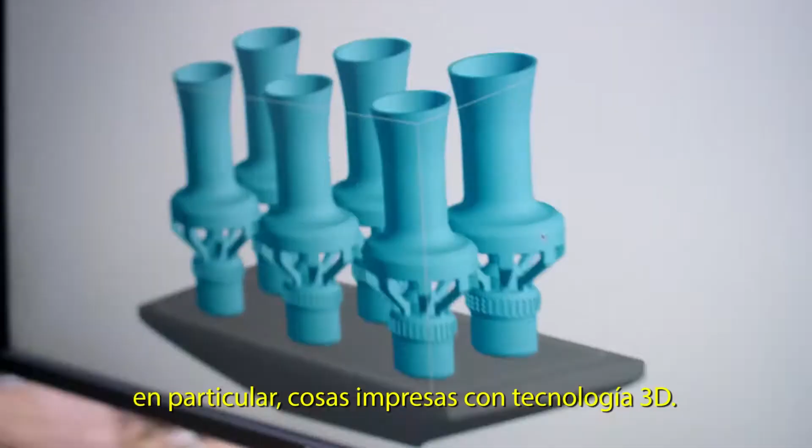Welcome to Carbon. We're a technology company changing the way the world makes things, specifically 3D printed things. We didn't start out trying to change manufacturing forever.

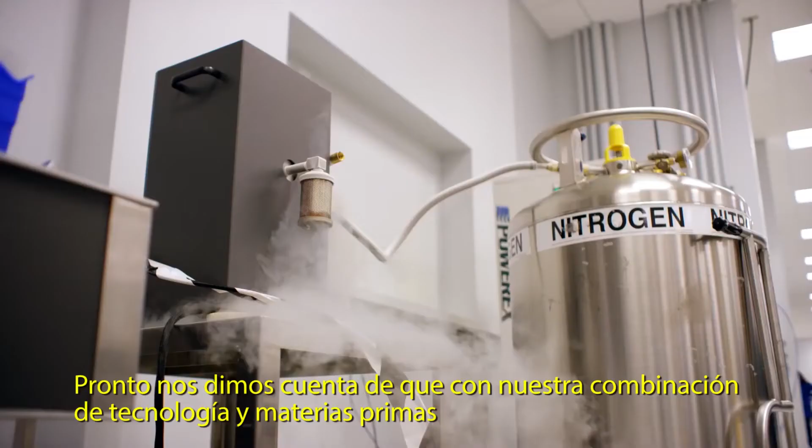We started with the simple goal of making 3D printed parts better. It's 25 to 100 times faster, which is game-changing. But we quickly realized that with our combination of technology and materials, we could make real parts with mechanical properties and surface finishes that make injection molded plastics obsolete by comparison.

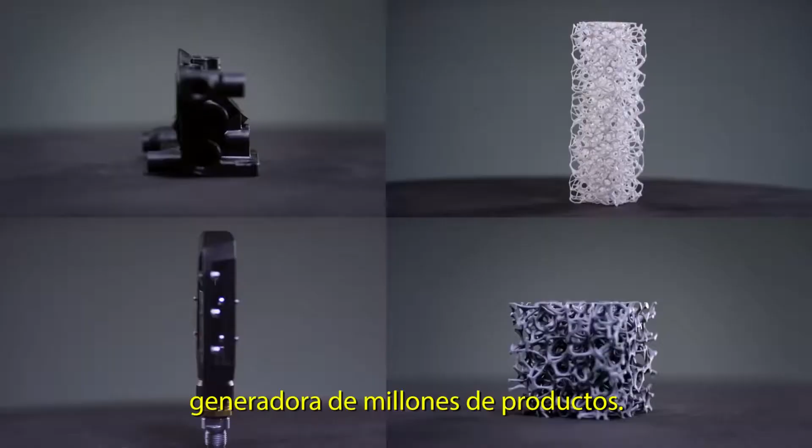Embracing the idea that speed to production isn't an obstacle anymore, it's the only way forward. And our partners share our enthusiasm for reinventing the rules. Partners who are manufacturing at scale, making millions of real products.

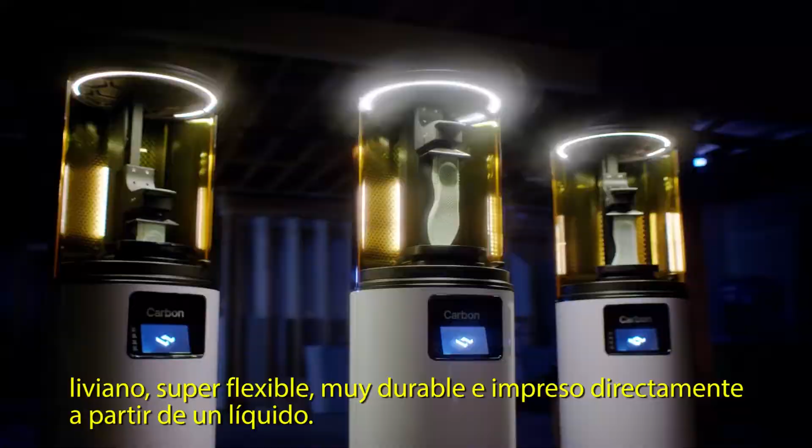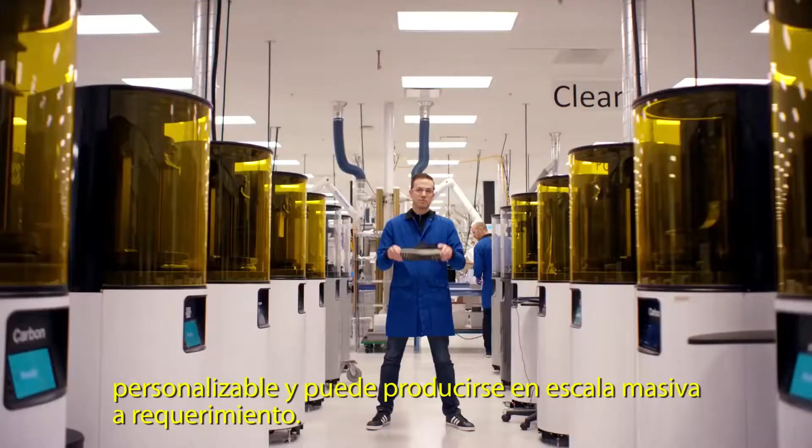In partnership with Adidas, we've created a midsole that shouldn't exist so that they could make a shoe that shouldn't exist. Light, super flexible, highly durable, and printed straight from liquid. A marvel of design and function, this shoe defies logic. And whether you want to make one or one million, this is true, customizable, and on-demand mass manufacturing.

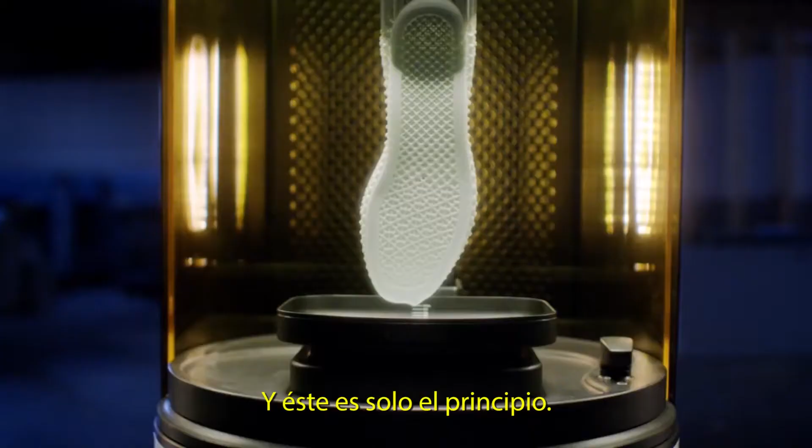This is not a publicity stunt. This is a revolution, and we're just getting started. Stop prototyping, start producing.

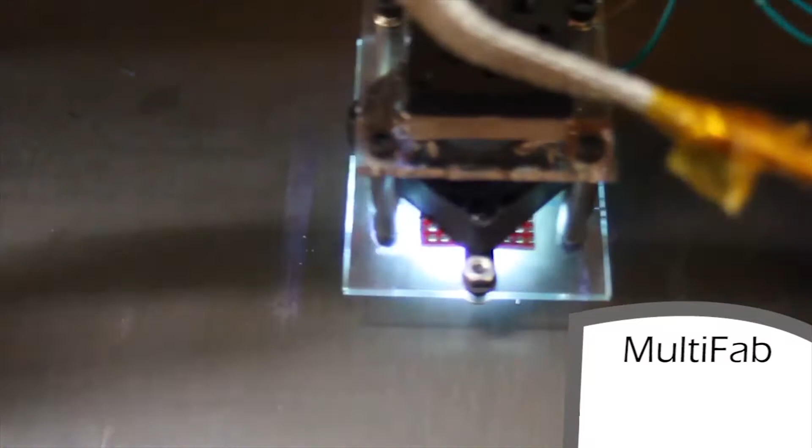The state of 3D printing today goes two ways. There are people developing machines that can print with materials we currently use through traditional manufacturing processes, and there are people developing platforms based on multiple materials. This will enable a broad range of new applications by manufacturing products we weren't able to make through traditional techniques.

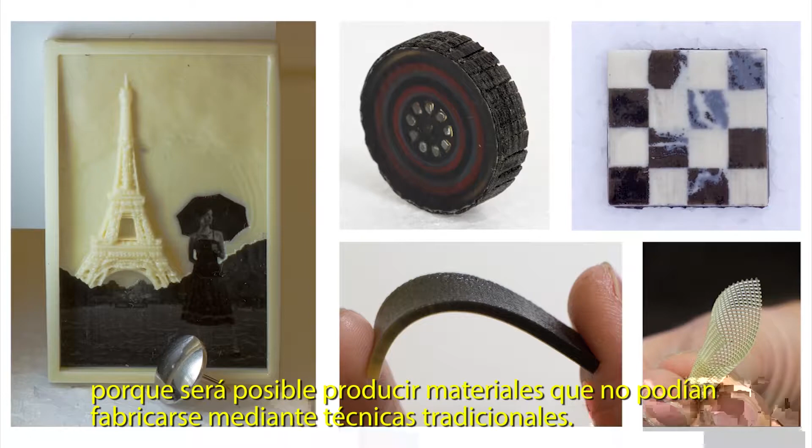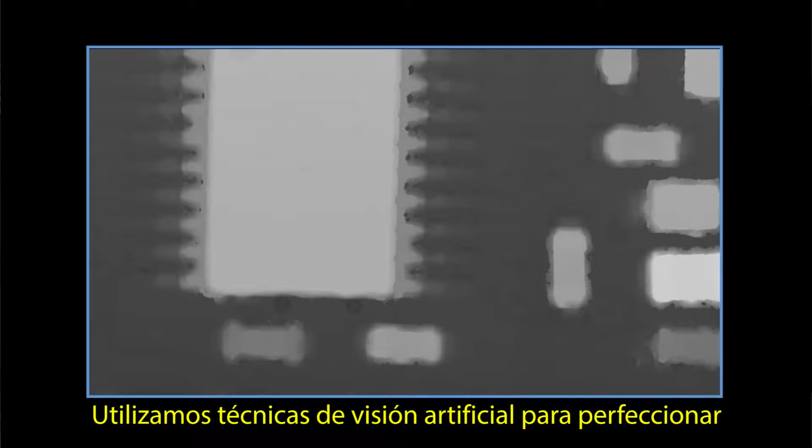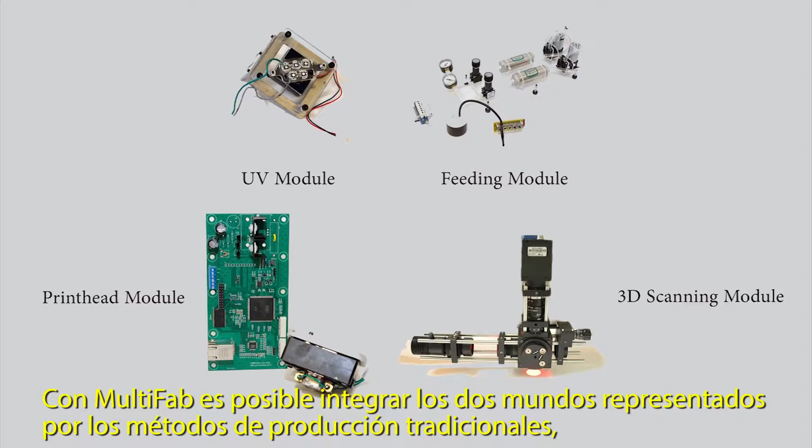We've developed a low-cost, multi-material 3D printing platform that can print with up to 10 materials, and it's machine vision enabled. We use machine vision techniques to enhance the capabilities of current multi-material printing technologies. We call our project MultiFab. With MultiFab, you integrate these two worlds of traditional manufacturing and 3D printing, and by putting them together, you can create a whole new range of objects that we haven't been able to make today.

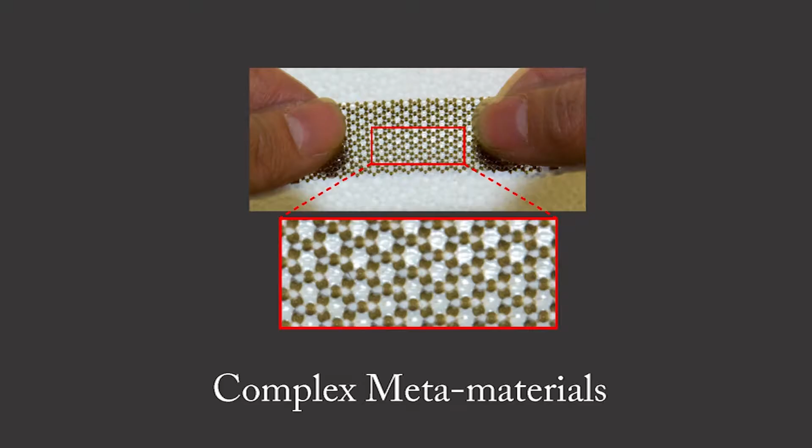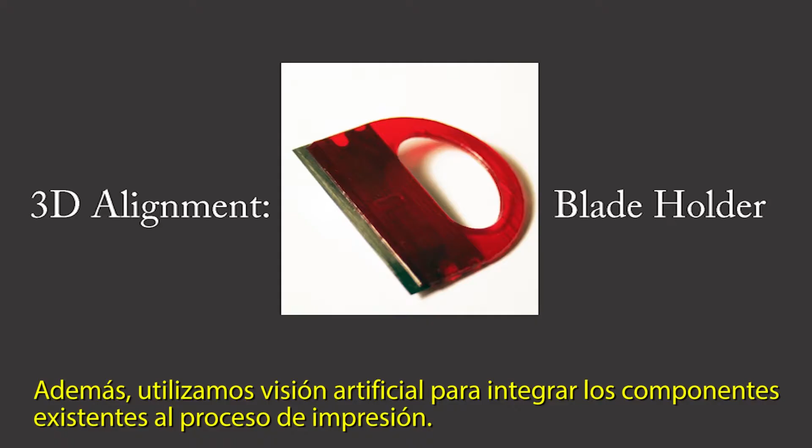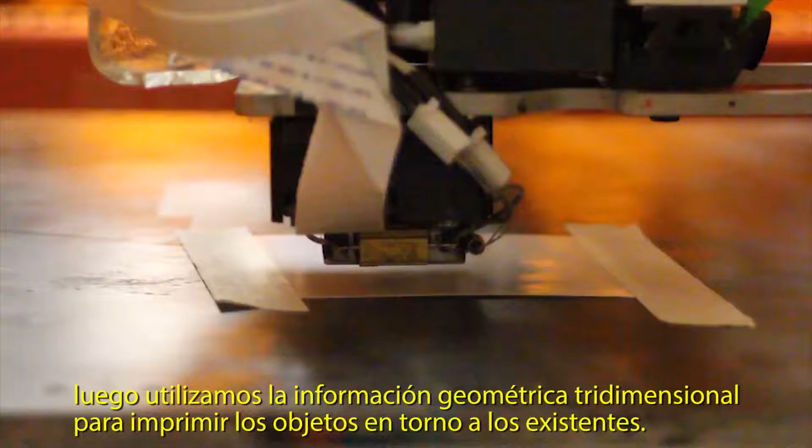The machine vision system integrated in MultiFab allows us to easily and very quickly calibrate the printing system. Second, we use machine vision to integrate existing components into the printing process. So imagine we put components into the printer's build platform, we scan the objects, and then we use that 3D geometry information to print objects around those existing objects.

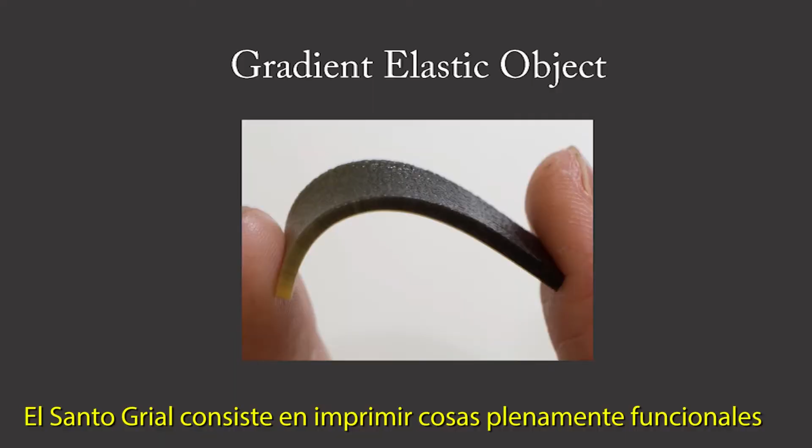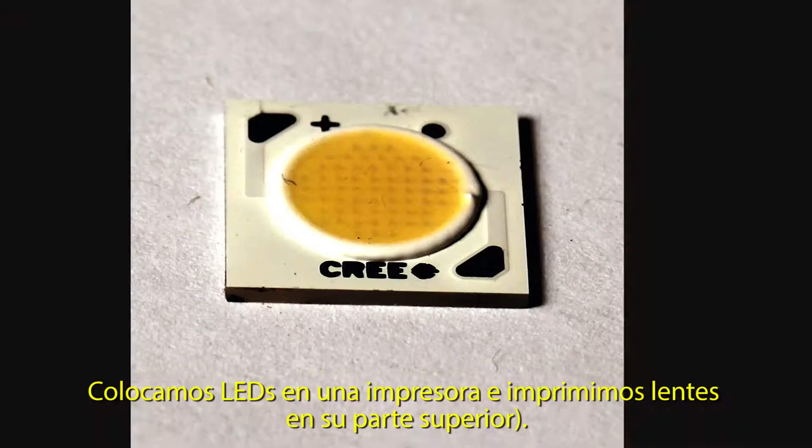Right now, a big portion of the 3D printing hardware available is focused on printing form and objects for prototyping. The holy grail is to print things that are fully functional right out of the printer, combining multiple materials with many different properties, but also existing objects that have some inherent functionality. We printed lenses on top of LEDs. We put this existing LED into the printer and we print a lens on top.

Designers and engineers are used to designing with one material, so the whole design paradigm, how we actually design products and objects, will have to change. That's going to require new hardware, new software, and whole new platforms, and we're going to have to change the way us engineers and designers think about design and creating products and objects.

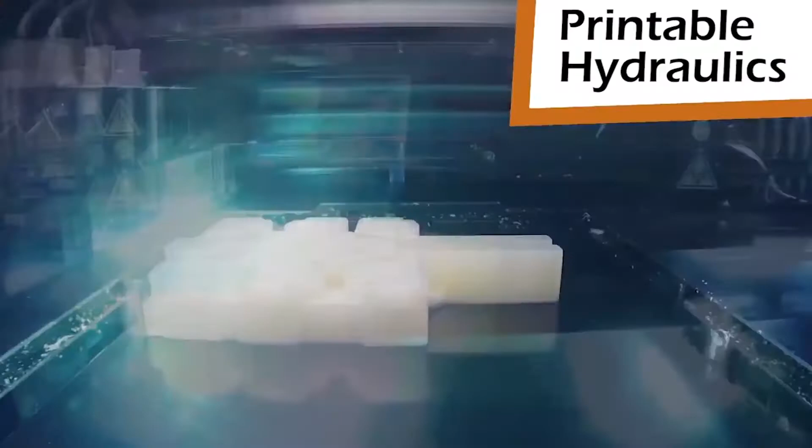MIT researchers have created a working hydraulic robot from a single 3D print, meaning the robot can move right off the printer after it's done, no assembly required. The tiny six-legged robots are out of MIT's CSAIL Computer Science Lab and are made of both liquid and solid parts that are fully functional right after the printing process.

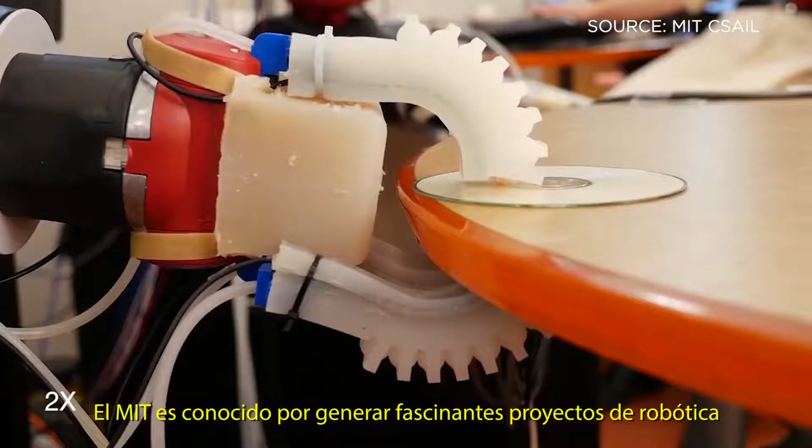The group used a printer from Stratasys, one of the largest 3D printer makers, and it can work with 8 different materials at the same time. MIT is known for producing intriguing robotics projects. It's worked with DARPA, NASA, and other organizations to create humanoid robots in the past. This fully assembled robot from CSAIL isn't exactly C-3PO, but it can walk off the printer using built-in bellows.

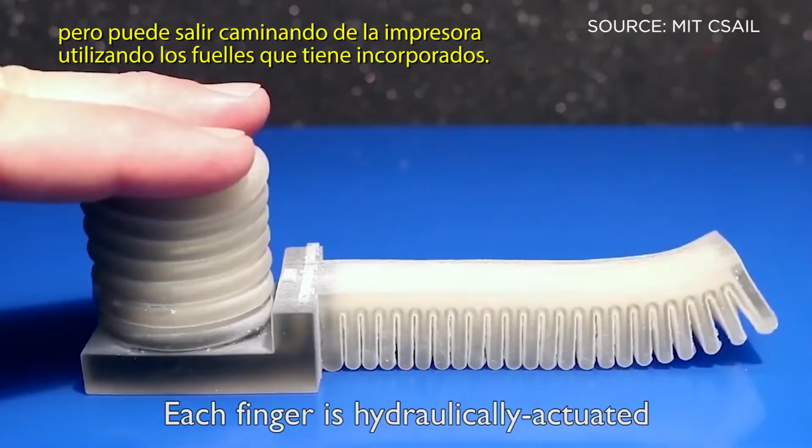The robot only weighs about 1.5 pounds and is 6 inches long. The little bellows allow fluid pressure to build up to the legs and push the tiny robot forward in a walking motion.

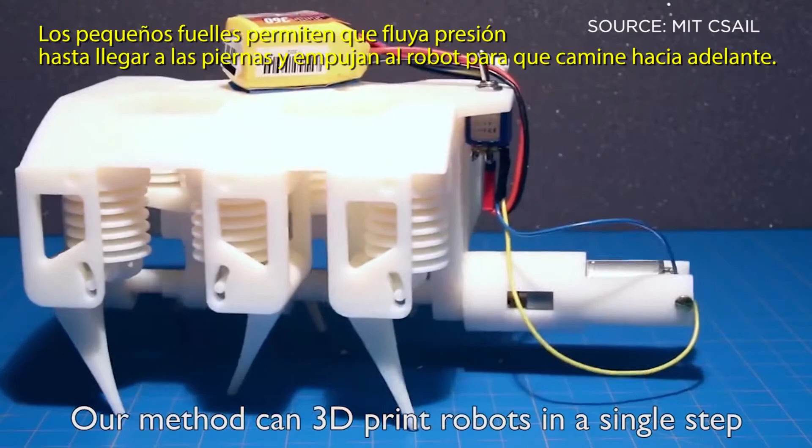The new MIT technology could have some pretty big implications in manufacturing's future. Think about printing off other household machinery in one go and just adding batteries.

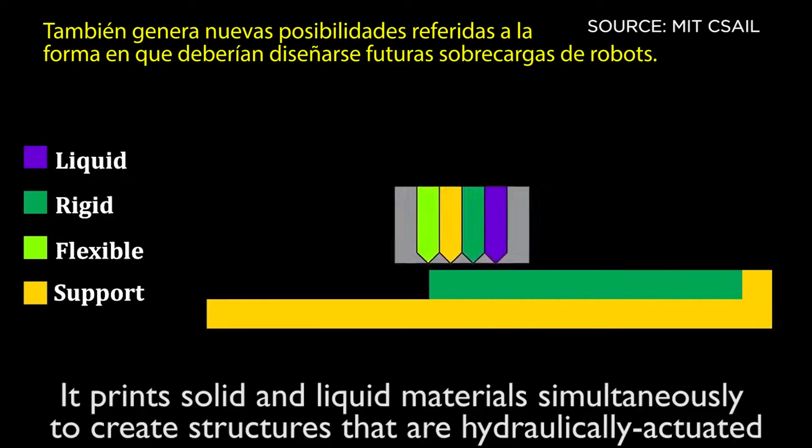It also opens up new possibilities for how we might design our future robot overlords. Think about it. What happens when the robots figure out they can just print more of themselves with the flip of a switch?

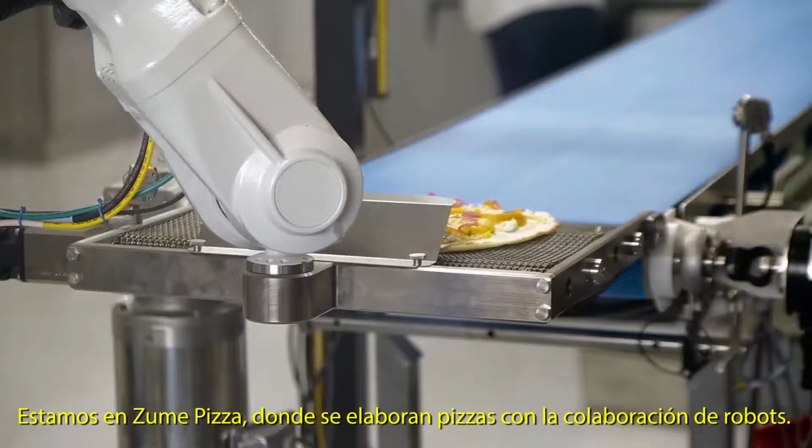We're here at Zume Pizza, where they make pizza with robots. We're gonna see how they do it, but first, let's order a pie.

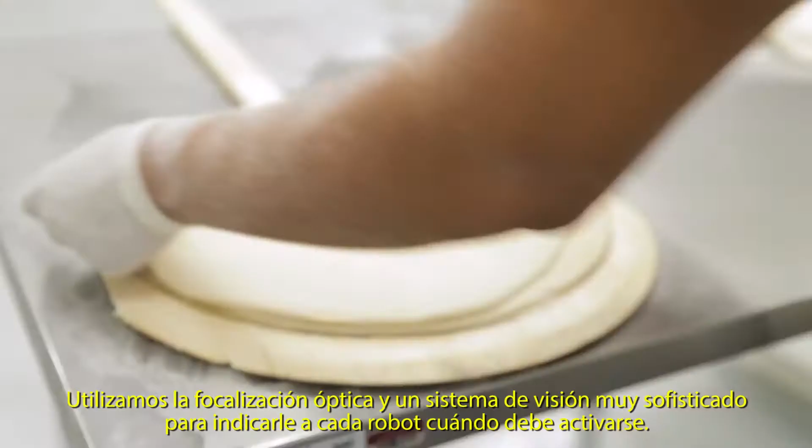At Zoom, humans and robots work together to make pizza, and you can see it happening from start to finish. The first step in the process is that the pizza is put onto the line. We use optical targeting and a pretty sophisticated vision system to tell each robot when to trigger.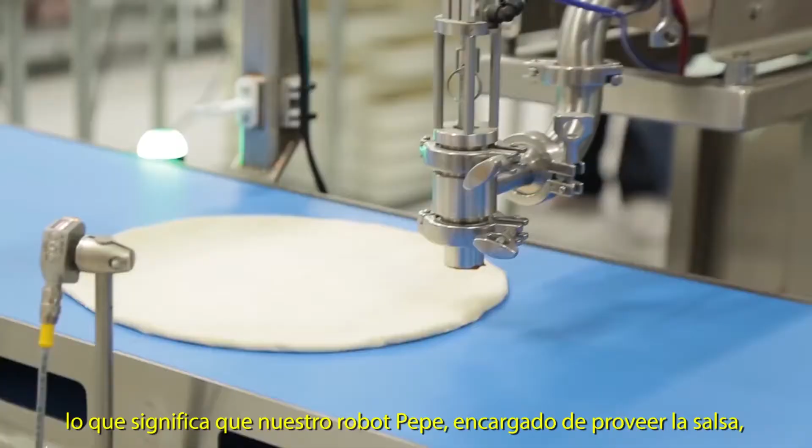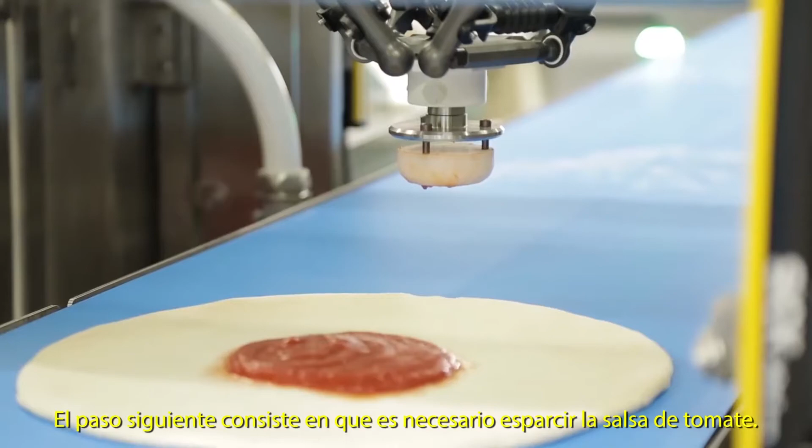So your pizza has tomato sauce on it. That means Pepe, our tomato sauce dispensing robot, knows when the optical target reaches its laser to dispense the exact perfect amount of sauce, which he did just now. Next, Marta, our sauce spreading robot, will take that sauce and spread it into a spiral.

The next step in the process is done by humans. Noel is one of our amazing pizzaiolos. He's gonna take that pizza, adjust any imperfections, and then actually begin to add cheese and toppings.

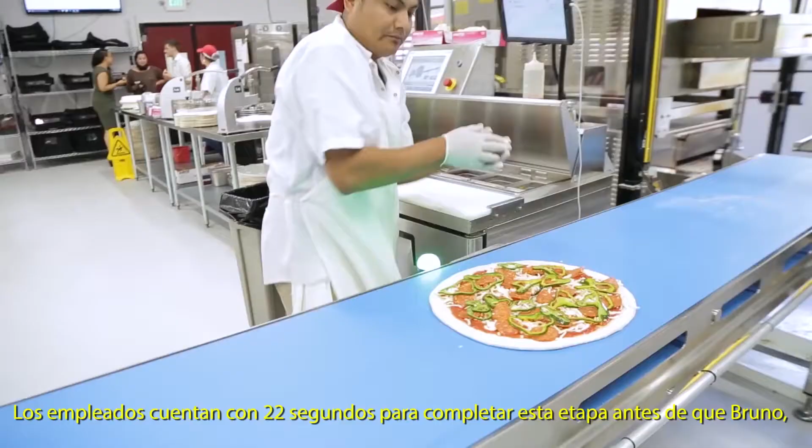The humans have 22 seconds to complete the topping step before Bruno, the next robot, takes the pizza off of the line and puts it into the par bake oven.

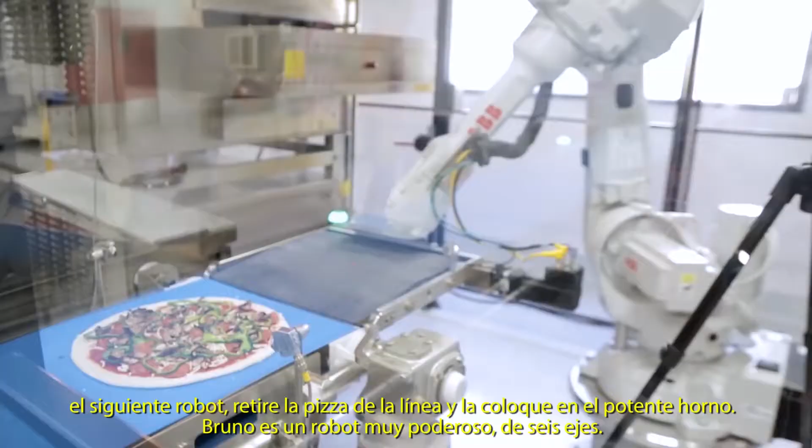Bruno is a very powerful robot. He's a 6-axis robot. You've seen this kind of robot mostly in manufacturing settings. We're using this robot to make pizza, so that means we need to fine-tune this robot so that it can actually mimic what a human would do with a similar tool.

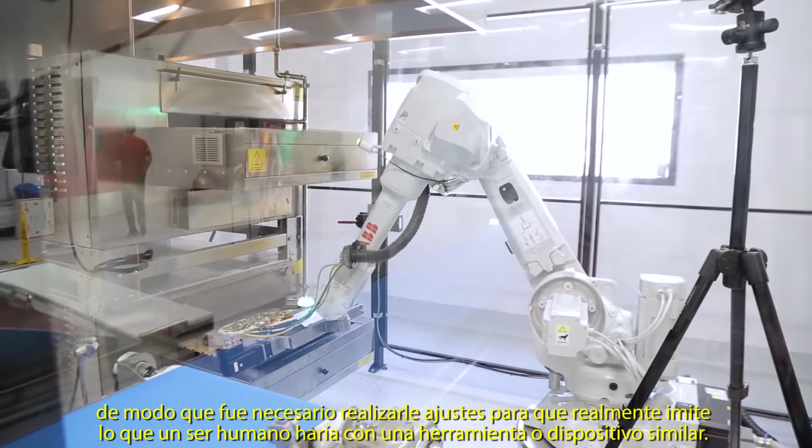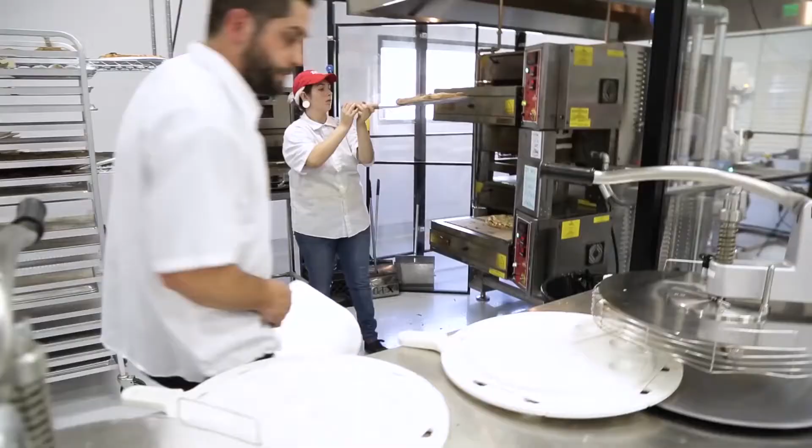So your pizza's ready. Oh, looks so good.

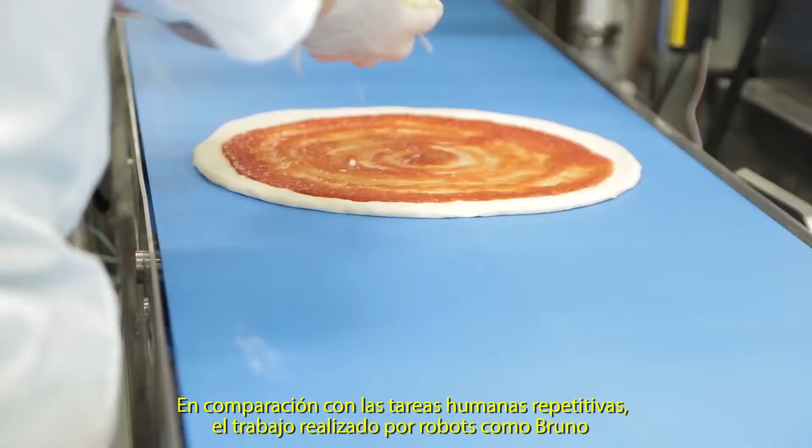So Giorgio, Marta, Pepe, Bruno, the pizza making robots that you saw today, allow us to reduce the amount of time for each individual pizza preparation step. They allow us to reduce the error rate because robots are designed to make the same motion consistently and perfectly. And they also allow us to invest more of our resources in high quality ingredients as opposed to repetitive manual labor steps.

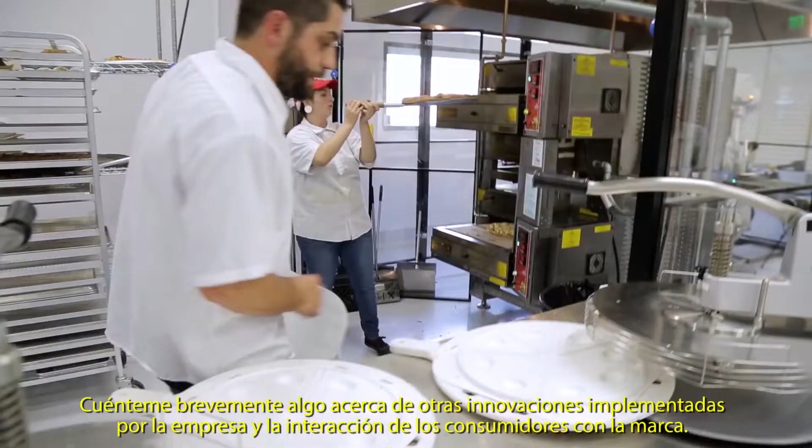Tell me a little bit about some of the other ways that you guys have been innovating, especially in how the consumer interacts with the brand. We want people to be able to get the highest quality food in about half the time.

Our average delivery right now is 22 minutes, and that's 22 minutes from the second that you place the order on your phone or computer to the time it actually arrives at your door. So your pizza is never sitting around.

And we have this team of pilots that are tied into a logistics and routing program that allows them to optimize their routes and minimize the amount of time that it takes to drive to your door.

You guys are already using robots, but what's next? You know, the next most important step for us is what we call baking on the way.

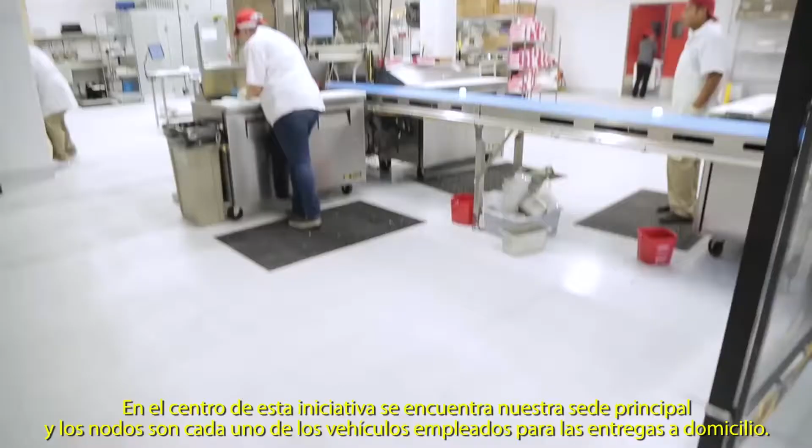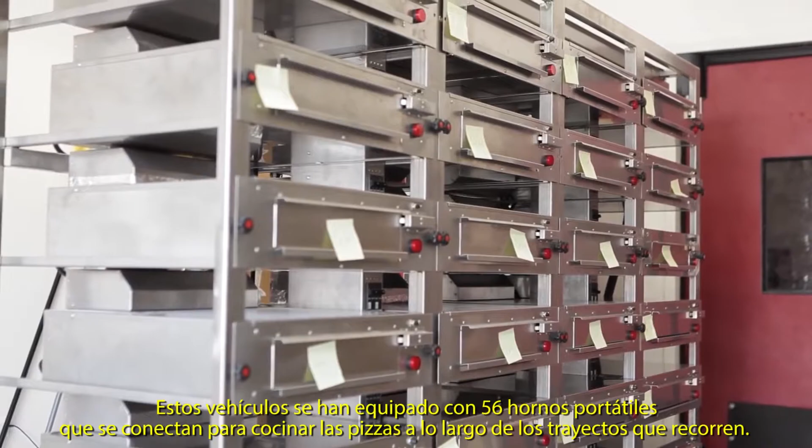In the center of it is our hub, our home facility here, and then each node is an individual delivery vehicle. Those delivery vehicles have 56 proprietary mobile ovens that are wired to actually cook pizza while it's being delivered. And Zume owns the patent for this technology, which we call cooking en route, or better known as baking on the way.

And so right now it's just pizzas, but am I going to be able to get like beef bourguignon someday via robots? You know, right now we're hyper-focused on giving you the highest quality pizza that we possibly can, and so that means we have to be laser-focused. But you know, it's a big wide world, and there's certainly additional opportunities to innovate beyond pizza.

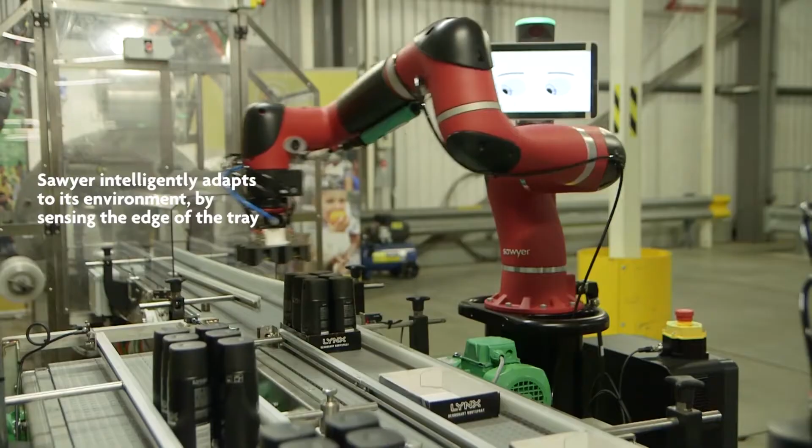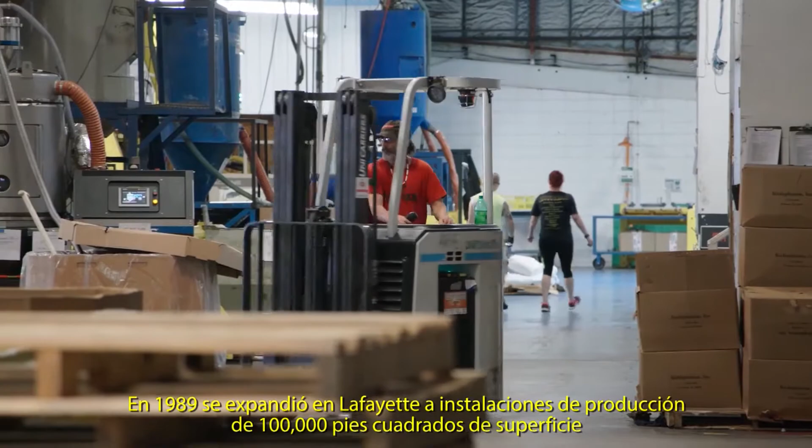Tennplasco was founded in 1985 in Carthage, Tennessee. In 1989, Tennplasco expanded into Lafayette, and now it has grown to 100,000 square feet of manufacturing facility and 86,000 square feet of distribution facility.

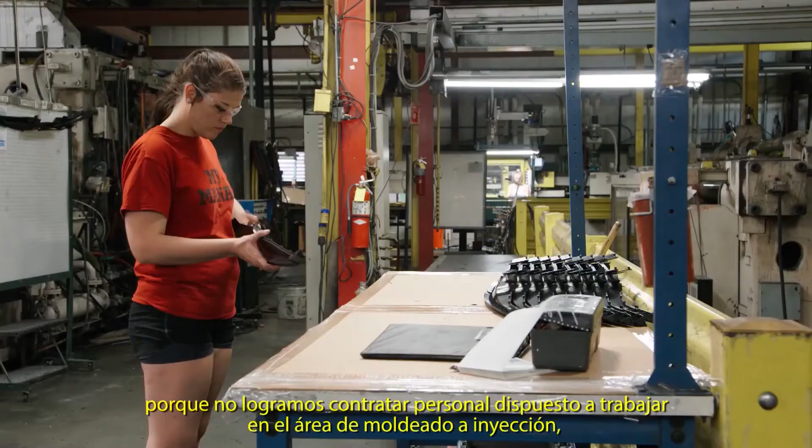While the economy is doing very well, we are having a very difficult time getting people to work, especially on the off shifts in the injection molding floor. Our customers are trusting us to support their business, so we have to find a way to meet their needs. We've been able to achieve that through innovation, technology, and robotics.

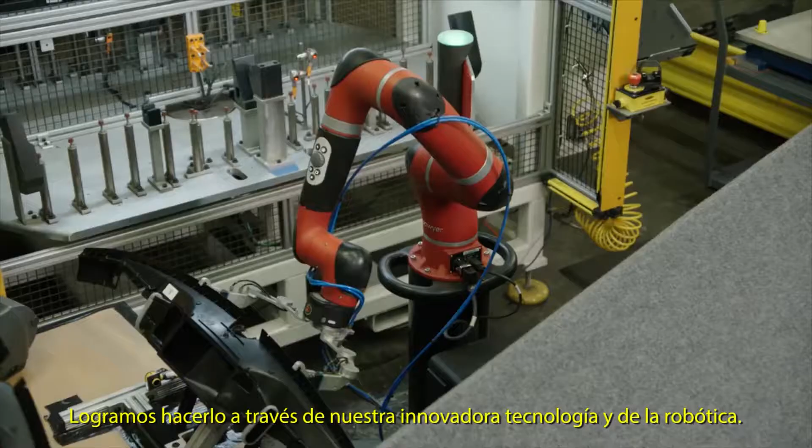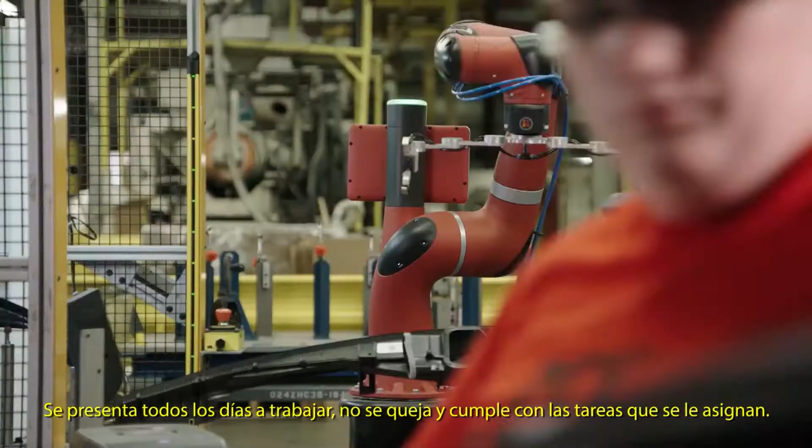Initially, especially with Sawyer, there was some anxiousness because it was new, but the people have been very accepting of him. They actually like him. They like seeing his face and his eyes and being able to interact with him. He shows up every day to work, he doesn't complain, and he does his job every single day.

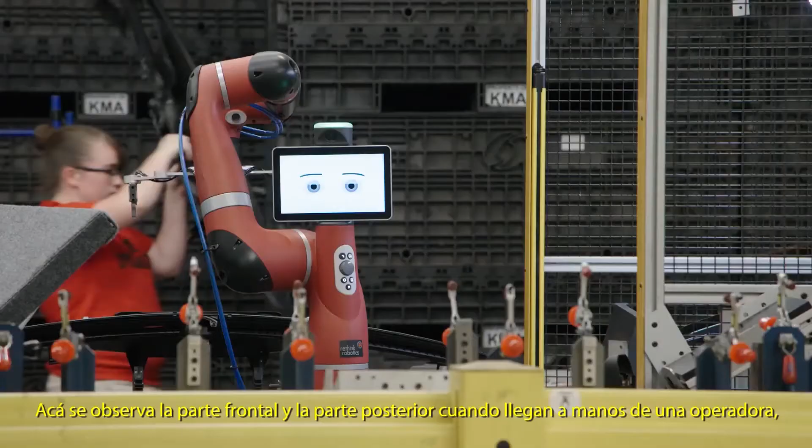Sawyer is currently working on a task of a defroster nozzle assembly for a large automotive company. Here you see we have the front and the rear. When they are brought to the operator, she takes the rear and the front and she snaps them together.

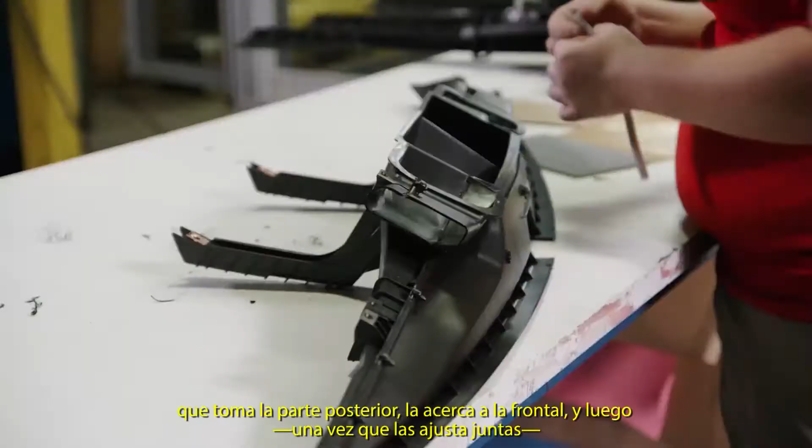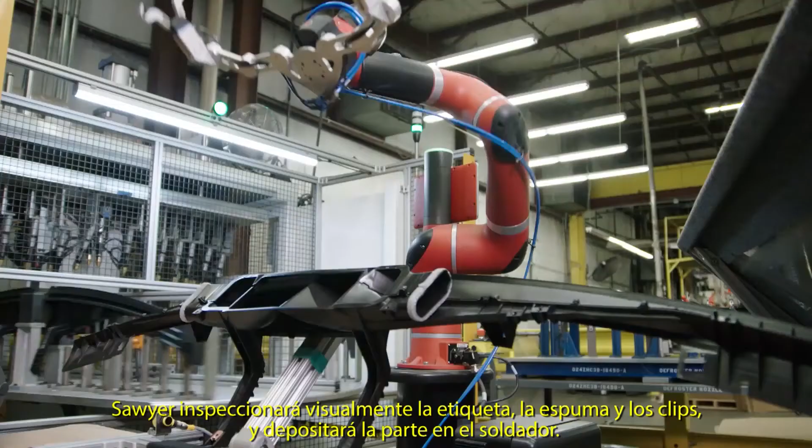After snapping them together, she will add two foam pieces and a label, and place it onto the fixture. The fixture will then tell Sawyer to come and pick it up. He will visually inspect for foam, label, and the clips, and then drop the part onto the welder.

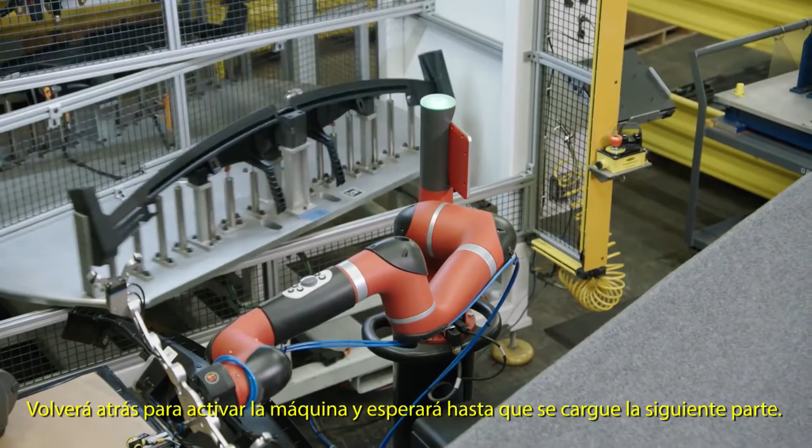He will back out, start the machine, and wait for another part to be loaded. Once the part is completed and the welder has cycled, Sawyer will come and pick it up and then go drop it off at the drop.

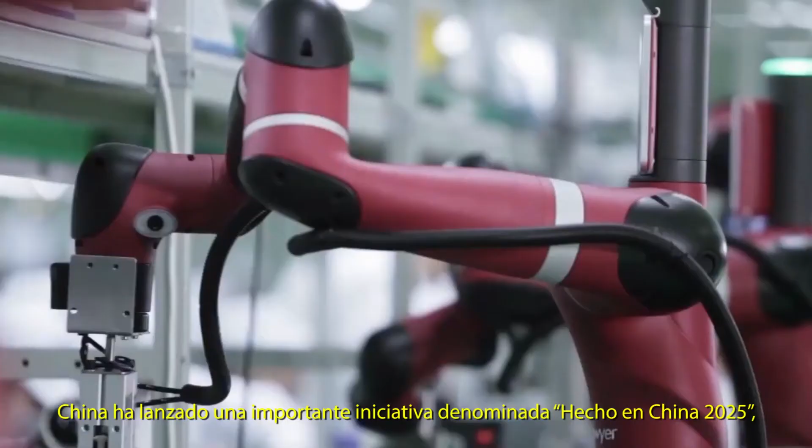China has launched a major initiative called Made in China 2025. It's part of a bigger program with the goal of making China the number one manufacturer globally, not just for cheaper or inexpensive parts, but for all parts, including high quality parts, by the 100th anniversary of modern China in 2049. What they've recognized is that over the last 30 years, what they've really been successful at has been being a low-cost labor region.

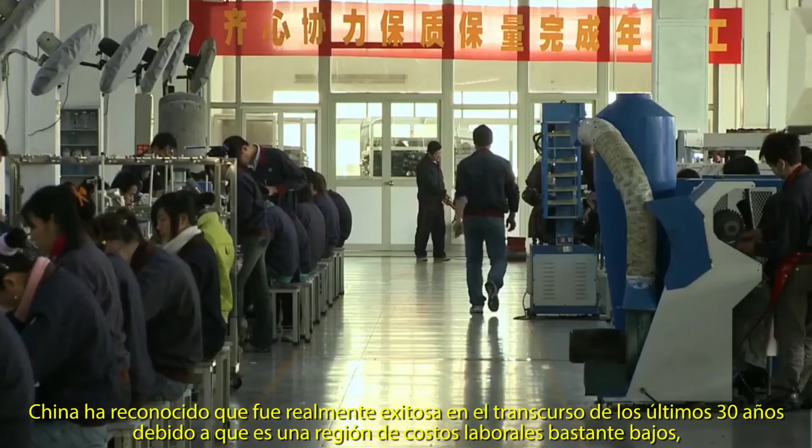So we've all pushed a lot of our manufacturing over there if we have a high labor content, in order to be able to compete on the global stage, because the alternative was to try to hire a bunch of people in the US cheaply. And I don't know about you, but I'd rather have my labor costs be high, not low. We didn't want to compete that way.

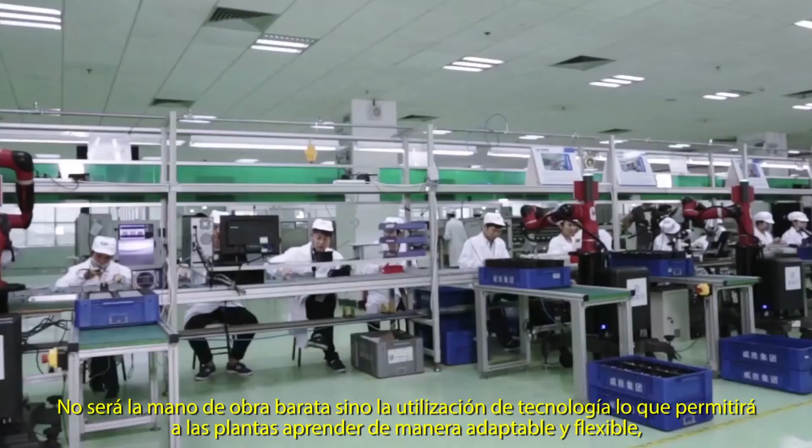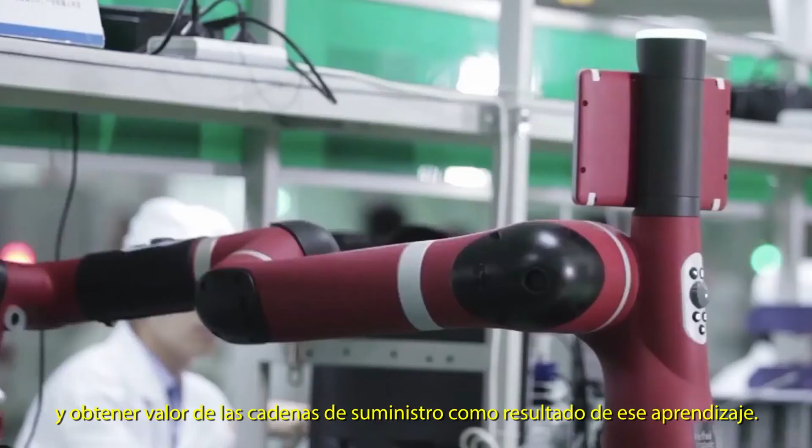But what's fascinating about this period in time is they recognize, and many companies recognize, that what's going to drive competitiveness over the next 30 years is not going to be low-cost labor. It's going to be utilization of technology that allows your factories to learn in a very adaptable, flexible way, and then gain value in the supply chain as a result of that learning. So you would think countries like the United States, where we're really good at innovation and technology, we'd be the ones out in front.

China is subsidizing the deployment of every single robot in China. If you want to deploy a robot there, they'll give you money to do it. If you want to create a company to build robots, they're going to give you money for that too. So there's just this massive push going on in China right now. They're going to try and fail, try and fail, try and fail, and try and knock it out of the park, and by then it's too late.